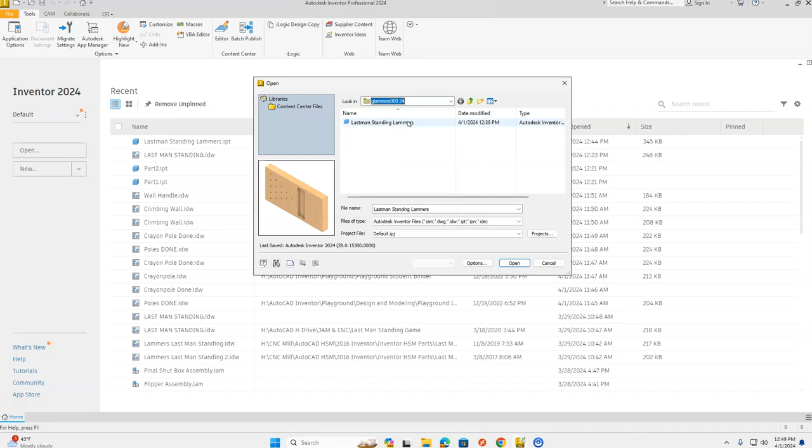To begin, we're going to go up to Orange File in the top left hand corner and select Open from the menu at the top. When our Open menu screen pops up, it should automatically open to your H drive, first initial last name 000. If it does not, click on the pull down menu and choose your H drive. In our H drive we should see our last man standing game. Select Open.

Now we're ready to create our toolpath. Right now we're on the 3D model tab. If you take a look above the ribbon bar, there's a whole bunch of tabs: 3D model, sketch, annotate, inspect. I'd like you to find the CAM tab. When you find it, click to select it, and our ribbon bar changes.

The first thing we need to do is set up our part, so we're going to choose our setup folder from the job menu in the ribbon bar. In our model browser on the left hand side, you can see we have 3 tabs going across the top, and we're going to work from left to right, looking at each tab from top to bottom.

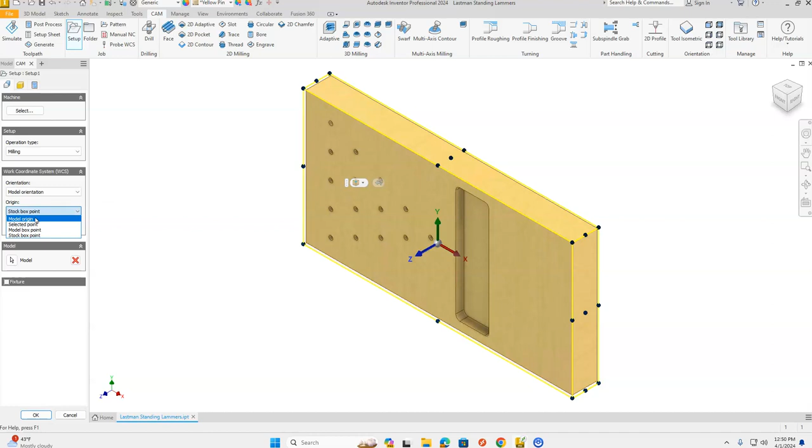In this first tab for the setup, we're going to come down to the work coordinate system, and where it says origin, we're going to change from stock box point to model origin. That's going to place the origin down in the lower left hand corner where we designed it.

Next we're going to go to the second tab, your stock tab. Here we're going to keep it at relative size box, but where it says stock offset mode, we're going to change this to no additional stock.

Going on to our third tab, which is our post-process tab, we're going to change to 1001, highlight that, and call this last man standing and your last name. Then down in the bottom of our model browser bar, we're going to click OK.

Now that we have that created, the first thing we're going to do is come up to our ribbon bar, and in the drilling section we're going to select drill.

Once again, in our model browser on the left hand side, we have 4 tabs going across the top. We're going to work these from left to right, and look at each tab from top to bottom. In this first tab we're going to select our tool, so click on the tool button here.

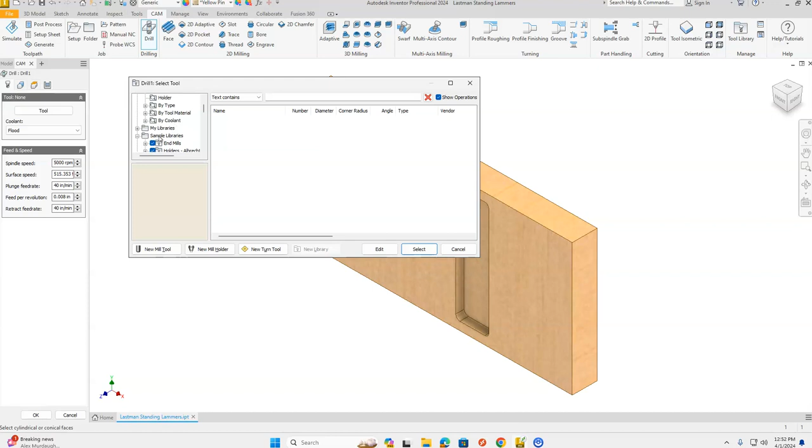In the little menu on the left hand side, we're going to scroll down a little bit, and under sample libraries, we're going to choose end mills, and select tool number 1, the 1/8 inch flat end mill, then click select. That's going to put our tool down here.

Let's go to our second tab, which is for our geometry. What we're going to do is come in and select the holes, going through and clicking each one of the holes that we want drilled.

It'd be nice to click them in a logical order, however we also have Optimize Order right here. With Optimize Order selected, the computer is just going to take care of how they're going to get cut.

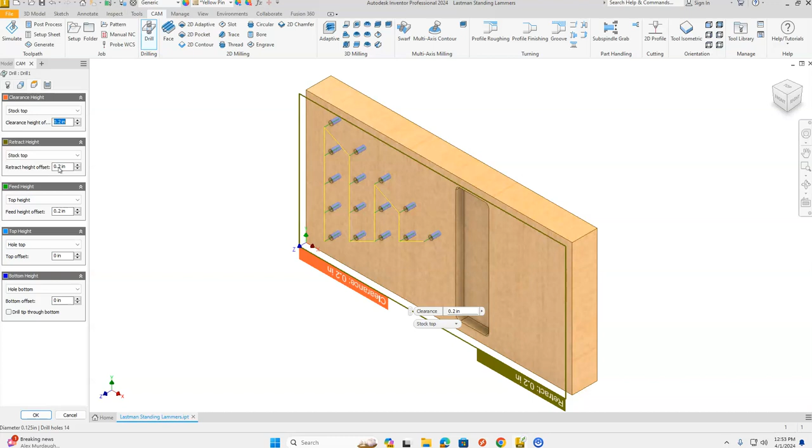Next we're going to go up to our Establish Heights tab, the third one. The top 3 settings here - clearance height, retract height, and feed height - we're going to change these all to stock top and 0.2. We're only going to do that for those top 3: clearance height, retract height, feed height.

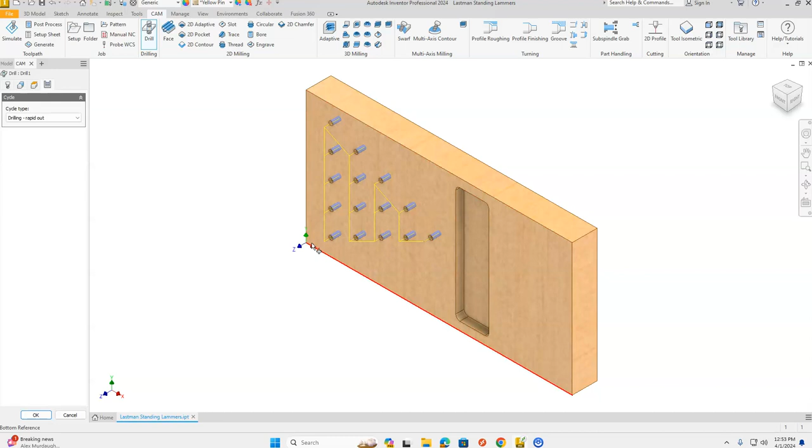Going on to our fourth tab, which is our cycles tab, we want to have selected drilling and then rapid it out. So it's going to drill in, get to the final depth, and then rapid retract out of the hole before moving on to the next one. Our holes are all taken care of, so let's click OK in the bottom of this model browser.

Okay, so we have our drill operation set up there. The next thing we need to do is run the toolpath to cut our pocket here for the game pegs. So we're going to do that in the 2D milling section of our ribbon bar. We're going to go up to the top, select 2D pocket. And once again, we have these tabs we're going to run across from left to right, and each tab we're going to look at from top to bottom.

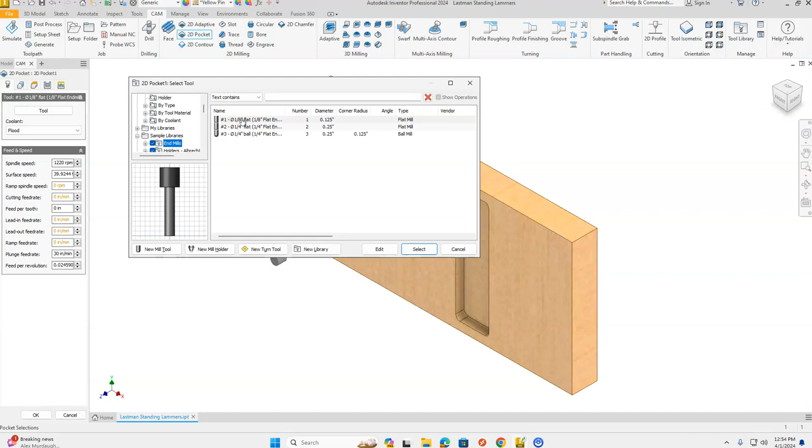So first we need to identify the tool. Let's click on our tool button. We're going to go to sample underneath sample libraries, end mills, and we're going to choose 1/8 inch flat end mill and click select.

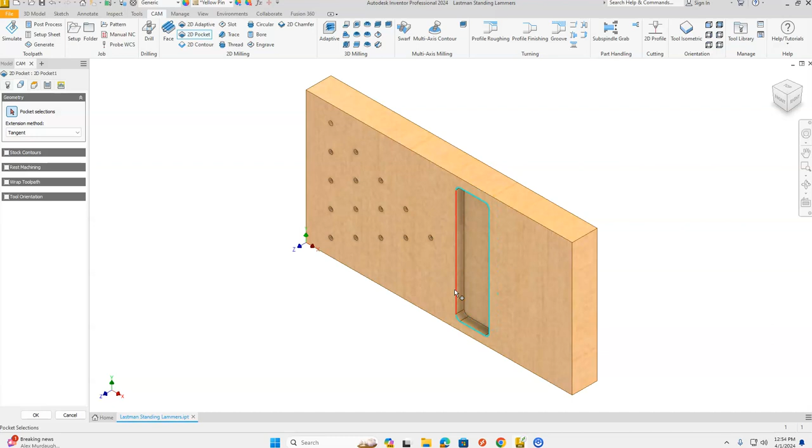Next we're going to go on to our geometry where we're going to select what we want to be cut out. When you're doing your selecting, make sure you're on the bottom surface. You see how it highlights red here. If you are on the top surface up here, it's not going to cut into the part. So we want to be on the bottom surface. And click when it's selected and highlighted.

Next, let's go to our Heights tab. In here, once again, clearance height, retract height, and feed height, we want to be at stock top and 0.2. Stock top and 0.2. Stock top and 0.2. So clearance height, retract height, and feed height are all stock top and 0.2.

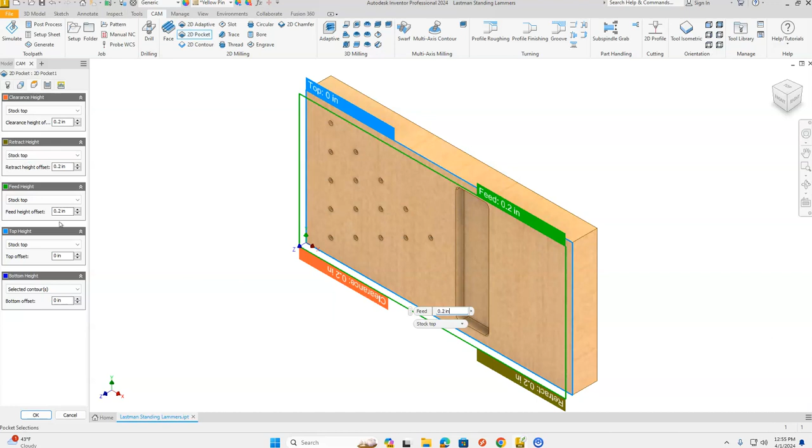Let's go to our next tab, passes tab. In here, the only thing we're going to change over is where it says stock to leave. We're going to uncheck that box. We don't want any stock to be left over. And then we're going to go on to our final tab, our linking parameters. In here, we're going to change our safe distance to 0.2.

And down in the leads and transitions, we're going to uncheck lead in, uncheck lead out. And our ramp style in the ramp section, we're going to change from helix to plunge. Okay, once we have those taken care of, we're going to click OK in the bottom of our model browser. And it should generate those toolpaths and show them to you there.

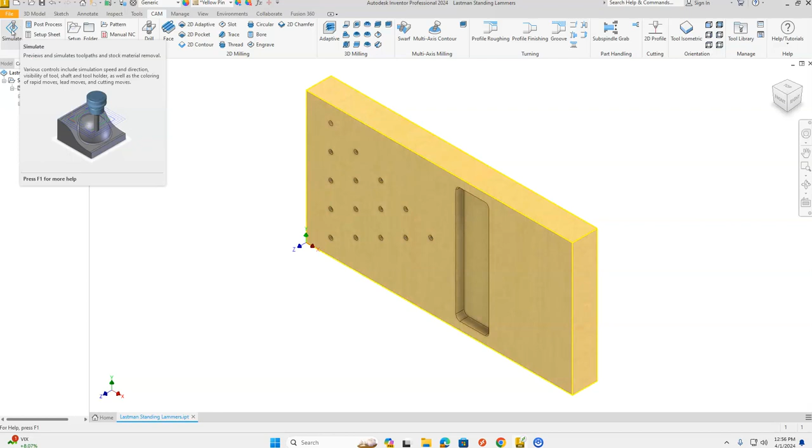Okay, let's go up to the top. Let's select Setup 1 from our model browser on the left-hand side. And we're going to go to Simulate all the way on the left-hand side of our ribbon bar. In the Simulate section, we're going to click Stock to turn the stock on. It should turn green. And then we're going to press play.

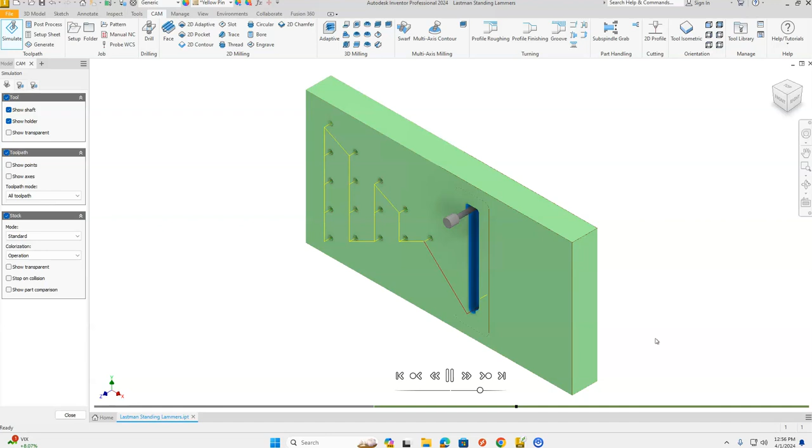And it's going to go through, show you how it's going to drill the holes, then how it's going to pocket that part out. We're making sure down here in the bottom we don't have any collisions and our part looks correct once it's finished running through. That looks excellent so far. Let's click Close down in the bottom left-hand corner of our model browser.

And now we're going to go up and post-process. So let's click post-process next to simulate. And in here there's a couple things that we want to change. We want to go to our output folder and we want this to go into our H drive. So click on the little button right here. And we want to be, I got to find my folder. Right here we are. First initial last name 000.

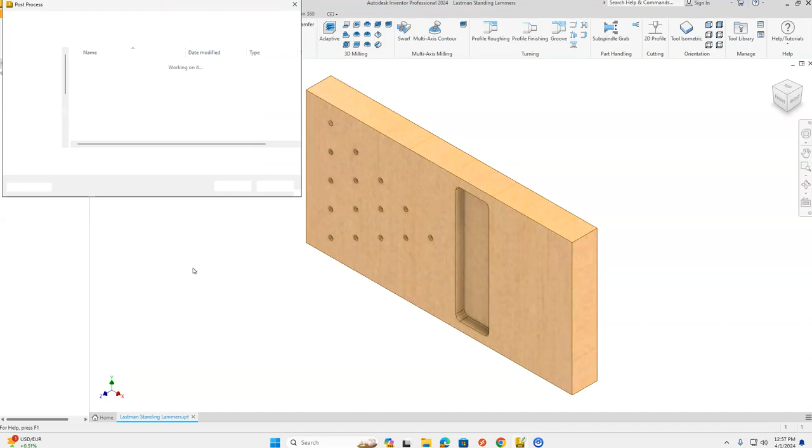Click select folder. It should carry through your program name, Last Man Standing, and then your last name. And then click post. Verify that that's what you want it called. Verify that this is where you want it to go into your H drive, and then click save. It's going to take a little bit of time in order to process the toolpaths.

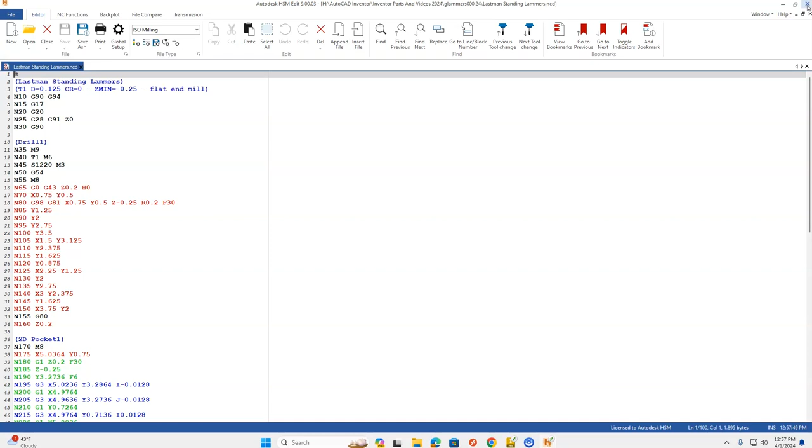When it does, your screen's going to change. And you're going to see all your M and G codes to control your machine and the X, Y, and Z coordinates that the tool is going to take as it's cutting. So let's go up to the top right-hand corner here and X this window out. That brings us back onto Inventor.

For good safety measures, let's go up to the orange file in the top left-hand corner of your screen, orange file, and go down to Save again. Once again, we're doing Save, not Save As. Okay. Now you're all set.

Let your teacher know that you are ready and your drawing is finished and you're ready to cut your part on a CNC mill. Next step, make sure you're talking to your teacher. Let them know that you're finished and you're ready to cut your part. Excellent. Nice job on running your toolpaths.